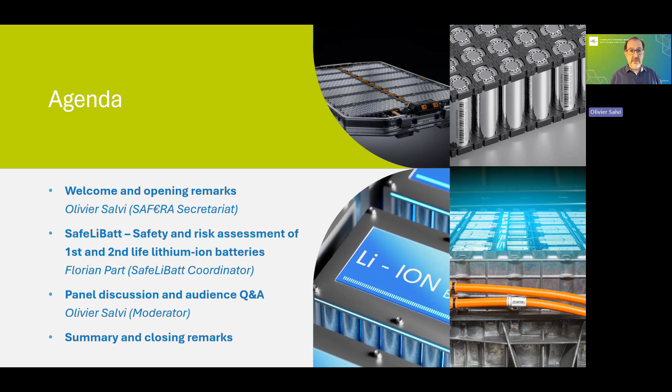So during this webinar, we will have first some words about the SAF RA initiative so that you know all about the context of this partnership. Then we will have a presentation for about 30 to 35 minutes from Florian Part. And then we have reserved time for question and answer about the result of this project, SafeLiBatt.

The story of SAF RA started in 2012 with the ERA-NET, a project aimed at coordinating the research investment in the field, in our case of industrial safety. And the vision that the partners have developed is to reinforce the competitiveness and the sustainability of the European industry thanks to improvement in safety, in good practice for safety and safety management. And the research that we would like to see is a research where we have various disciplines working together and interaction with the stakeholders.

The SAF RA mission is to coordinate the research investment in Europe and encourage the cooperation between researchers from various countries and scientific disciplines. Also create new perspectives and opportunities for safety research to provide industry with forward-looking solutions, to try to anticipate. Also share emerging societal concerns, knowledge and research results on industrial safety thanks to the SAF RA symposium that is organized every year, and promote research on industrial safety as a competitive advantage and also a contribution to societal decision-making on innovative technology. So this is, in a nutshell, the mission of SAF RA, which has also values.

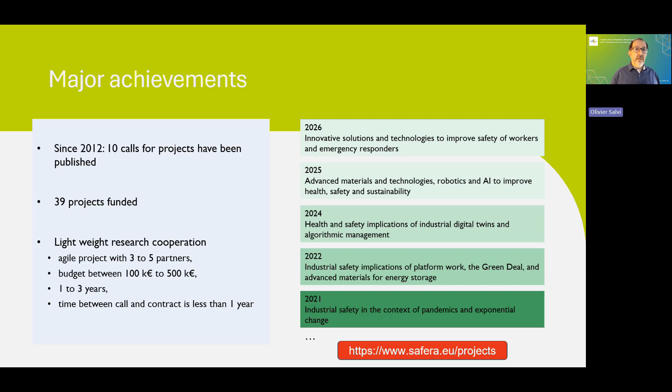So I would like now, after this introduction, to give the floor to Florian Part from Boku University. So Florian, if you can turn on your camera and take the control for your presentation. We are all very ready to hear about the results of the SafeLiBatt project.

Okay, good morning, everybody. So now it's an honor to present the results of my colleagues, because I was the coordinator and we had many PhD students working on that, and also other colleagues from France and Germany. And today you will hear the results of the SafeLiBatt project.

Right, I will take just my laser pointer. Now it should work. Yes. You already see my slides, probably. Yes, we see. Okay, so the laser pointer is not working.

First, we'll start with a very generic thing, because nowadays we are always talking about value chains, but we have to change our minds, because we have to rethink everything, because we are mostly talking about value cycles.

So today we are not talking about the first use of lithium-ion batteries, mostly about the second use, and there could also be a third use or a fourth use of the e-vehicle battery. And after this, after a certain capacity loss, the batteries will reach the end of life, and then we are talking about waste treatment and the end of life phase, in order to recycle the battery once again.

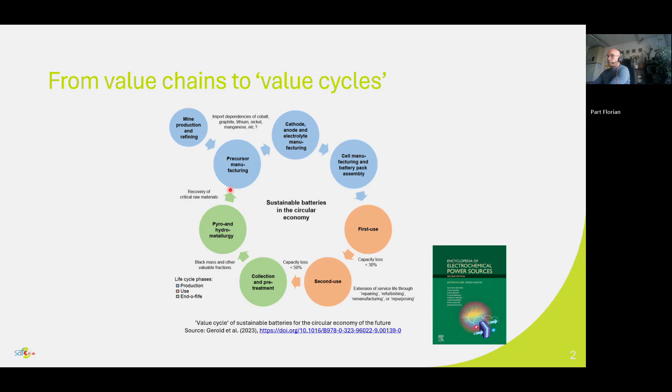What was the motivation of our SafeLiBatt project? So our, let's say, hypothesis to start was, when the capacity of a battery reaches a loss of down to, let's say, 70%, the first life batteries can be replaced due to security and warranty reasons. And then the battery, in our perspective in environmental sciences and sustainability, should not directly go to waste recycling, but it can be used for a second life.

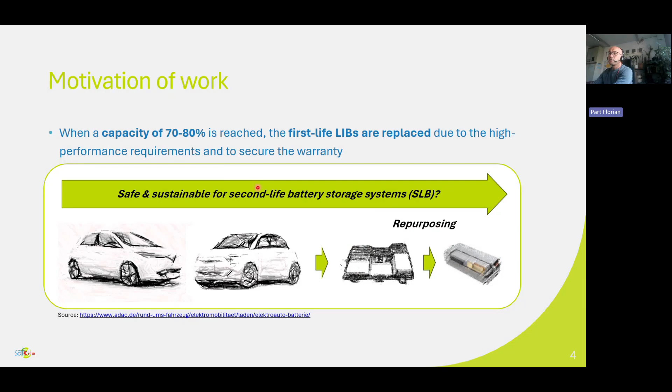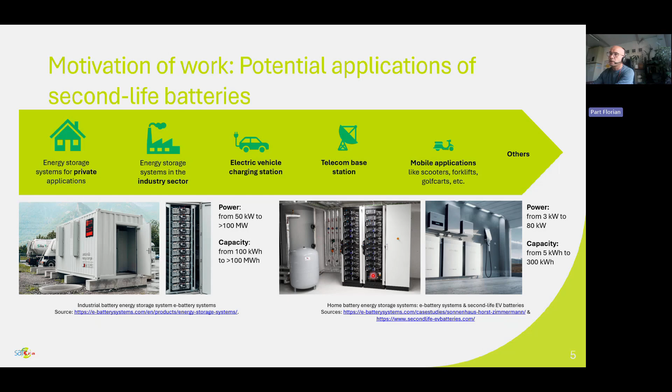And today I will mostly talk about repurposing. Repurposing can be made for different applications, what you can see here. So in our project, we focused on private applications, but the second life batteries can also be used for bigger battery energy storage systems, like you can see here, or even for electric vehicle charging stations, or for telecom base stations, or even for small mobile applications, such as forklifts, for example. But you can see already here some already commercialized systems for households, and once again for industrial applications.

In our project, we started in January 2020 and finalized the project in May 2024. So it was a big success and a long story because we had many things to do. The first work package was about abuse and thermal testing. The third one was about assessing the risks of possible gas emissions. Then we had a work package on life cycle assessment. And to the end, we also performed some socio-economic impact assessments.

So what you can see here is our team. So thanks to all of them for the hard work. And I'm really happy to see that most of them are already PhDs and really made a nice career.

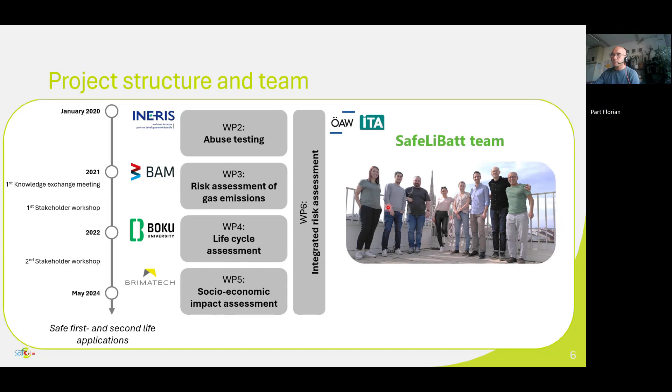What we did, once again, our methods during our project. So we dismantled commercially available hybrid electric vehicles and battery electric vehicles. What you can see here, we obtained the cells because we did our testing on the cell level. I have to emphasize this. And then we did this aging and abuse testing. We collected all of the data, used the data for life cycle assessment and also for risk assessment.

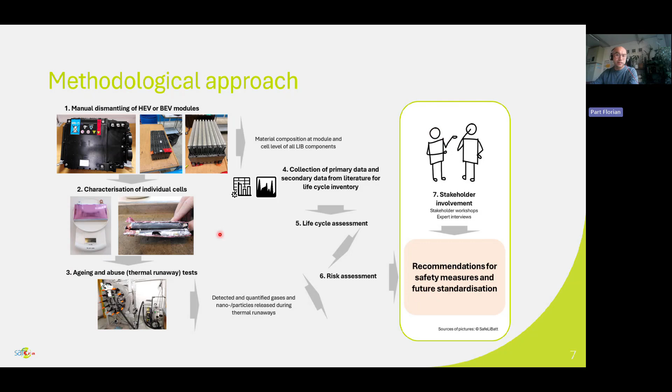And based on our results, we involved also stakeholders. We organized stakeholder meetings and also stakeholder workshops. And then we could derive some measures for safety and standardization. Now you will see the tests from the abuse and risk assessment tests.

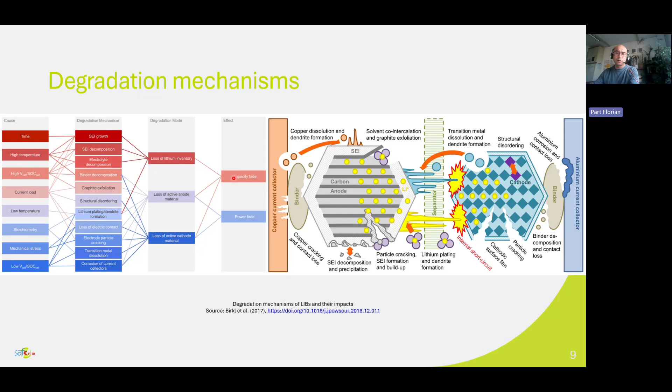Before I talk about this, our start was, okay, we have to dig a little bit more into the degradation mechanisms. So once again, for most of you, it's probably not new, but for example, high temperature can lead to SEI growth or decomposition, or fast charging can lead to binder decomposition and so on and so forth. So what you can see, the degradation mechanisms, which will lead in the end to the capacity loss of the batteries.

What we did in our case, so once again, we had some cells. We obtained some cells from commercially available modules. And then we had 3 different types of cells. So one prismatic, a pouch, and another pouch, with different nominal energy content between 19 watt hours and 290 watt hours, to see if there are any differences in testing.

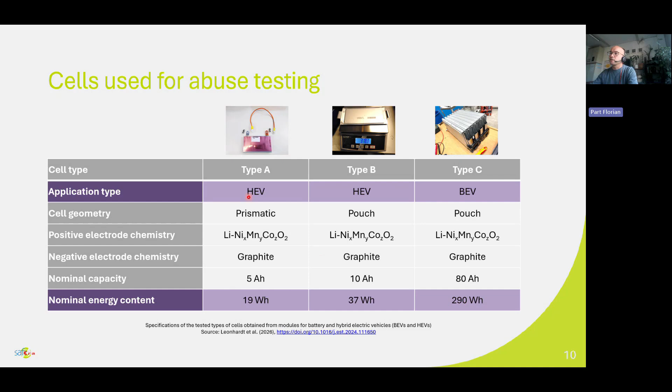Then the BAM in this case, Robert, did really a great job in cycling and calendric aging our cells in order to have different states of health. So then we compared the cells at the beginning of life, so the new batteries, with the, let's say, midlife. We set this at 80%, and then we simulated also end of life stages at SOH of 60%. We were focusing, Ineris, Arnaud and Robert from BAM.

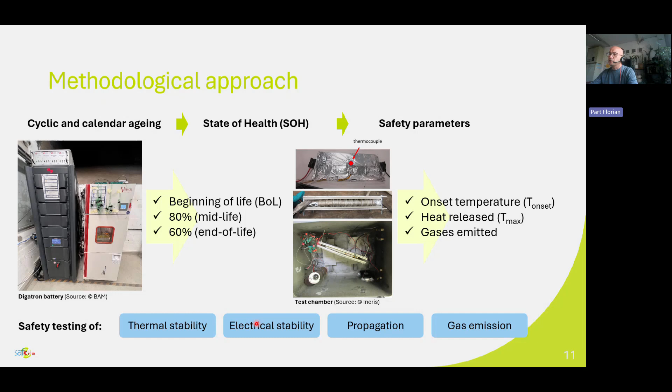They focused on the safety parameters: onset temperature, which heat will be released and which gases will be emitted. And then we tested thermal and electrical stability, also the propagation and the gas emissions. So here you can see an overview of our aging and abuse test methods. So first we aged once again, and then we had different single tests where we applied different test setups.

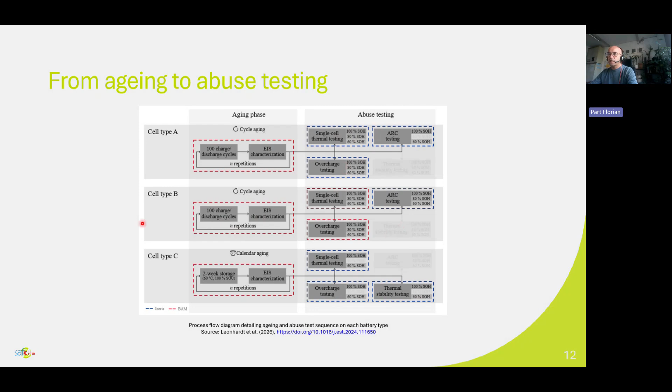What you can see here is very unique also in Europe, because they had their own customized battery test centers. One is in France from Ineris. So here you can see the test chamber, and this is the test chamber with the BAM setup in Germany. All of the systems are coupled to FTIR analysis for the gas emissions and also to GC-MS, to quantify the gas emissions.

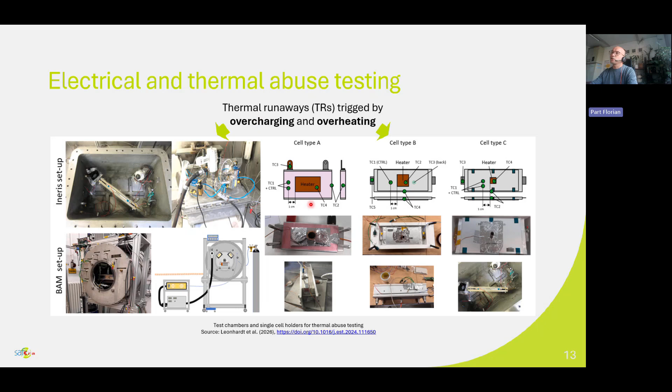Here what you can see is different cell holders, which was a lot of work in order to customize the systems and to provide reproducible test conditions. Then we had different thermal runaway situations, triggered once by overcharging and the others by overheating.

You can see already here the results on thermal and electric stability. What you can see first here on the left side is the temperature profiles and maximum temperatures during the abuse test. What you can see here are the differences between the beginning of life cells, and the yellow ones are the aged cells. The thermal abuse led to differences in the maximum temperature, but also in the onset temperature when the thermal runaway will be initiated.

So there's a difference between the beginning of life and the second life. The maximum temperature decreases in the case of second life batteries, but the onset temperature also decreases. So the thermal runaway will be triggered earlier. What you can see here in the middle is the results on the electric abuse tests. So the voltage before the first thermal reactions also goes down in the case of second life tests. If you are interested in more detail, because the time is very limited today, I will just refer to our publications, which were luckily published last week.

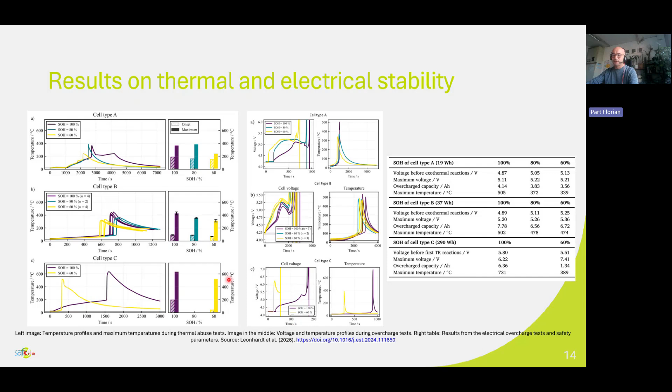And then you can see here the results from gas analysis. Once again, we quantified the gas emissions using FTIR and H2 sensors, and also GC-MS analysis for the trace gases, what you can see on the right side. But let's go back to the left side. So here you can see the differences in the cell types. There is not a significant difference in emitted gas volume, the relative one, which we normalized at 1 watt-hour, when we compare the new batteries with the second life batteries.

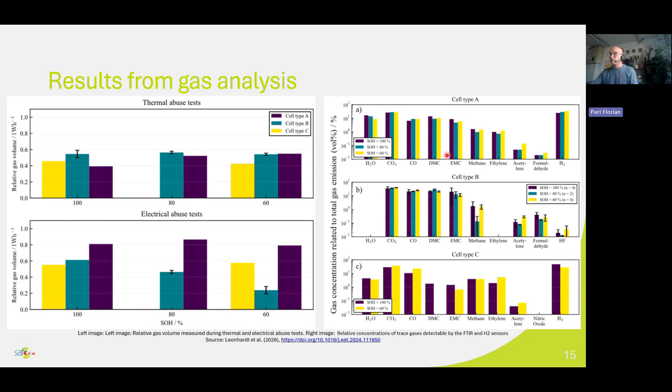What you can see here is also not a big difference in the behavior of the aged cells. These are the yellow bars once again with the new ones. So we always see some gas emissions, DMC emissions and EMC emissions; they were almost the same when we compared the first and the second life situations. So then I already have to conclude these results from work package 2 and 3.

So once again, the cells were after aging more sensitive to thermal runaway, and the onset temperature also decreases. And also the overcharge tolerance decreases. So a thermal runaway, this is what we conclude, happens possibly earlier. The maximum temperature also decreases, but the mitigation of thermal propagation is then, in our case, I think, facilitated when we are talking about second life applications. And the volume of gases slightly increases.

And the overall composition of the gases, which I haven't shown you before, remains very similar. So we conclude that the risk in terms of the toxic gases remains the same. And then we overall concluded that the technical requirements in battery energy storage systems are not the same as in a car, and therefore I think the use of second life batteries should be safe for second life BESS applications. So this is what we conclude here.

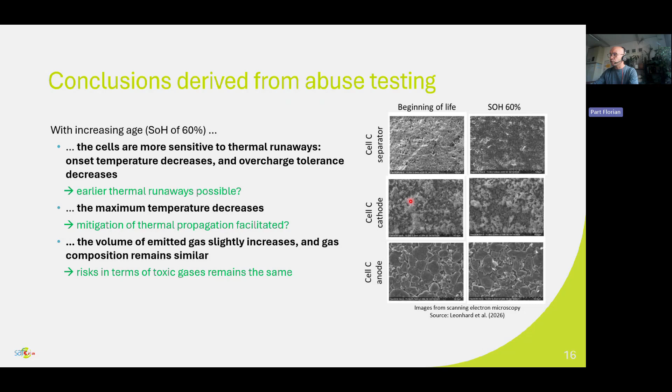Then what we recommend once again: we can achieve almost the same level of risks, but please take care for which second life applications you will use your second life battery. This also makes a big difference regarding the technical requirements.

And then concerning regulatory and governance, we also really recommend, or we wish, that we can continue our work in standardizing most of the test setups and harmonizing it, because we are competing with the worldwide market and we have to harmonize it maybe on the OECD level or on the UN level, which is still in progress. Because also BAM and ENERES are highly involved in these UN safety standards.

And then we should also expand our standards, the test standards for second life. And then let's think once again about the state of safety, because most of us are talking about state of health, but for state of safety, the onset temperature is very important, for example.

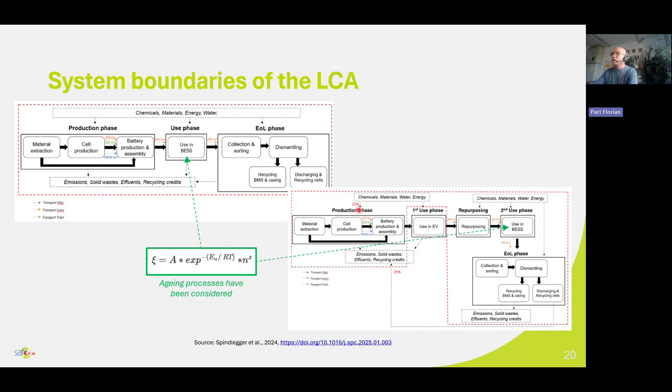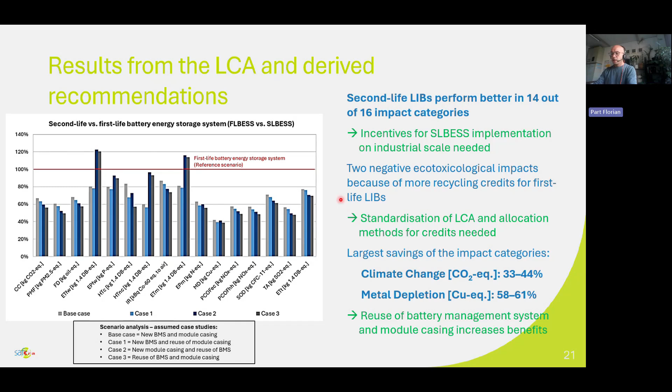And then I still have some time. I will also show you our results on the socio-economic impact assessment. This was mostly the work of our PhD student, Stephanie Prenner. She also did excellent work and published many things. So sorry, I've forgotten one publication which should be shown here, but I will share the links anyway.

The first question was in our case, okay, we have now a promising second life market, but where are the barriers for the market entry? Because, you know, there are not so many companies who are already commercially providing second life, for example, battery energy storage systems, BESS. And Stephanie studied the framework conditions and, once again, the barriers. And this work was also very interesting.

She applied a so-called PESTL analysis, where you consider the political framework and also socio and economic aspects and so on and so forth. We conducted many expert interviews and also, once again, stakeholder workshops.

And then we found which are the highest barriers. When we are talking about politics and regulations, most of the entry barriers for second life applications are insufficient standardization and regulations. This is just needed, and then we need also certifications. We are always talking about warranty, and the warranty is a big issue when we are talking about second life.

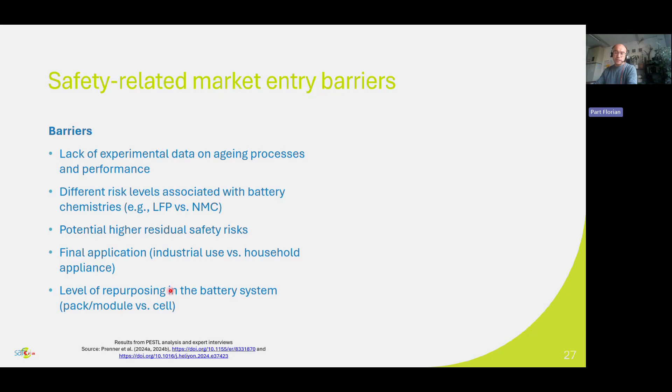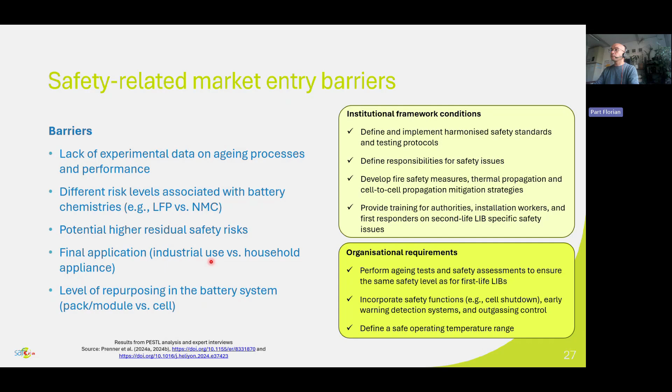And then once again, here you can find the summary, and all of this you can read also in our nice publications here. They are already published online. And then this is really one of my last slides because I'm always over time. And I'm sorry for that.

We identified for future or potential second life applicants some key performance indicators. So we asked regulators and customers, or even the automotive industry, which KPIs are relevant for second life applications. And then we differentiated between environmental, technical and safety related KPIs, and economic KPIs, of course. And when we are talking about the environment, we always have climate change in mind. So we were talking about CO2 savings, but also when we are talking about the circular economy, the resource savings are always important, and we always have to compare it with first life applications.

And then the recycling rate. So in this case it is also important in terms of when we are talking about safety. SOH is important, but also very important is the remaining useful lifetime. And this can be predicted by some AI-driven aging methods when you have access once again to the battery history. This is the prerequisite for it.

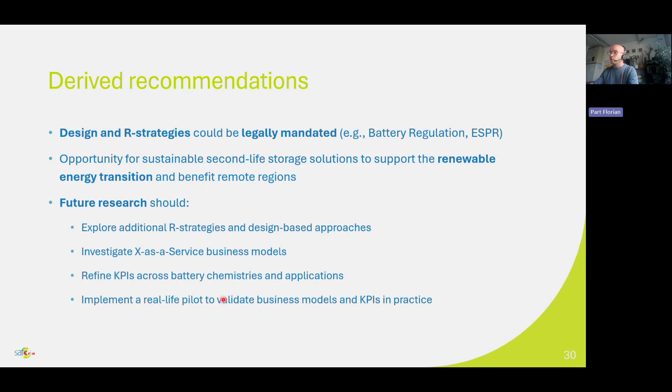So then, sorry for being late and talking very long, but we produced a lot of results, and I have to thank of course the team, because this was really great. It was really one of my best collaborations ever, and hopefully we can continue it. And then also for the funding, because without funding this would not be possible. And hopefully in the end we have a kind of system change, because we need some transformation towards a circular economy and also a sustainable battery industry.

So thanks for your attention, and now I think there is some time for discussions.

Yes, thank you very much, Florian. It was very informative. We see a lot of results which are interesting in different directions. Very useful.